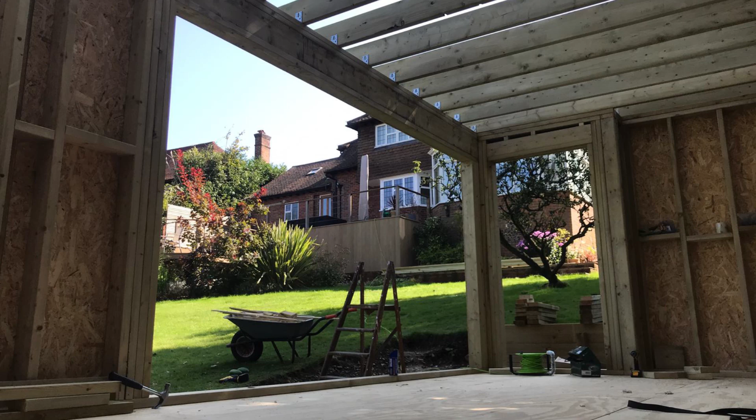I know many designers on YouTube use a program called SketchUp to design their garden rooms. My background is actually IT, but I still found it difficult to learn and was wasting too much time on it. So then I thought about using Microsoft Excel. I know this seems like a funny bit of software to use, but it did allow me to design and cost my entire garden room before it was built.

It gave me a cost for all of the immediate materials, such as the timber, the insulation, the vapor barriers, the rubber roof, etc., but not all the screws, nails and fixings, because I just had no idea what those numbers would be. We had a budget in mind, and this method reassured me that I'd finish the project within budget.

We wanted the garden room to be as large as it could possibly be within the UK planning policies and building regulations. So let's look at these a bit more closely.

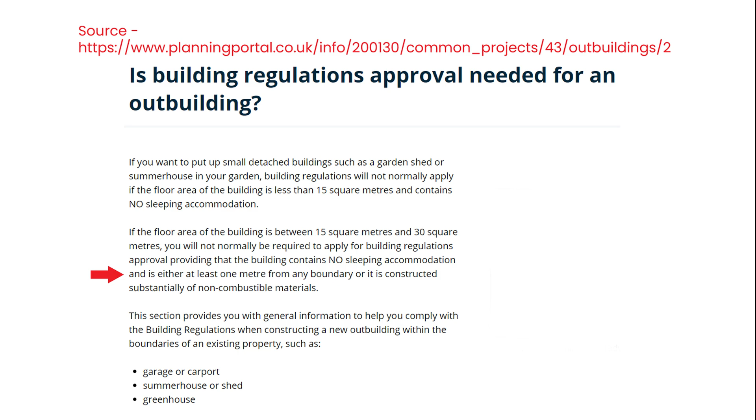The key point for building regulations for outbuildings is the internal floor area. Here, where the red arrow is, you can see that as long as the building contains no sleeping accommodation and is more than a metre away from our boundary, we can build something between 15 and 30 square metres internal space, and it will not require building regulations.

The key point for planning permission and outbuildings for our situation is also marked here in red. The outbuilding must be single-storey with an eaves height of 2.5 metres, and a roof no taller than 4 metres for a dual-pitched roof or 3 metres for any other roof.

The point in blue also applies: if the outbuilding is within 2 metres of the boundary, then it must be no taller than 2.5 metres. However, in our case, we were able to build 2 metres from the boundary and get that all-important height of 3 metres. This decision is mostly based on the fact I wanted the ease of building a warm roof construction, and therefore needed that extra height.

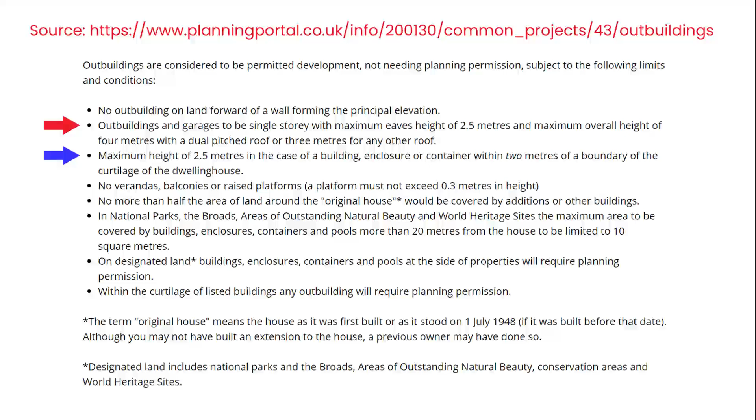Even though my building wouldn't have to comply with building regulations, as the garden room was going to be mainly used as an office 5 days a week and then as a small gym and TV room, I wanted to make it just as insulated as a room in the house would be.

So on my second tab in this spreadsheet, I copied in some information to do with span tables and kingspan U values. You can see in this table that the domestic building regs for 2020 are very tough - no way am I going to get down to these values. So then I looked at the non-domestic regs and thought that they would be achievable. After all, this is just an outbuilding.

The lines highlighted are what I decided to go with. In all 3 cases for the roof, walls and floor, 120mm thick PIR insulation would get me pretty close to the non-domestic building regs U values. Plus, this meant I could buy a big batch of 120mm insulation and use it across all of the areas, therefore reducing my waste.

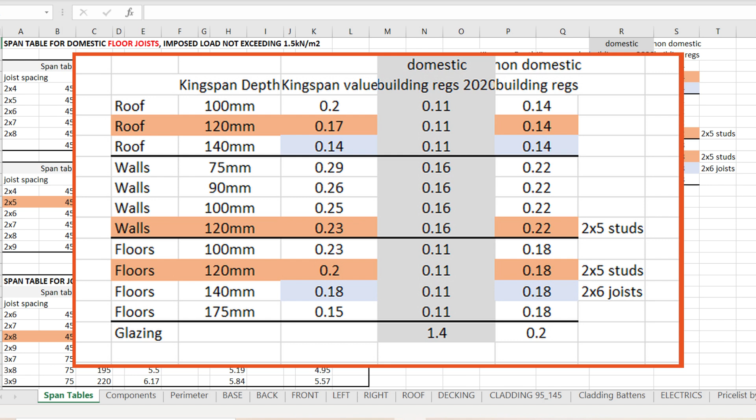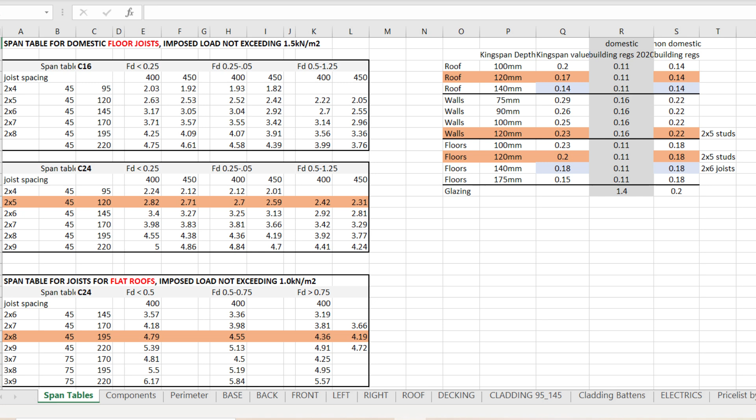Now that I know the thickness of insulation I need, it looks like much of the structure will be done in 2x5s. So what span does a C24 piece of 2x5 have?

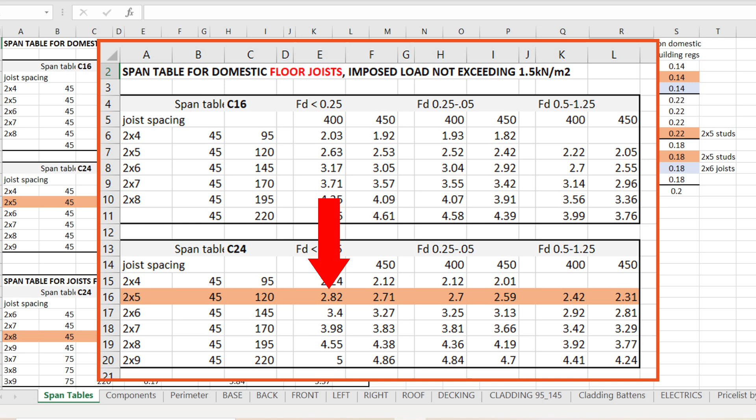When I look at my span table, I can see that for the greatest load, which I want to bear in mind as I'd like to have heavy gym equipment in one corner, a C24 2x5 at 400 centres will span 2.42 metres. The lightest load will span 2.82 metres. So this information dictates the distance between my piers.

When I look at the roof joist span table, I really don't want them to be larger than 2x8s. As I have a height restriction of 3 metres for my room, anything larger than a 2x8 would push me over. So when I look at the 2x8 span versus loading, I can see that the maximum span for the lightest load is 4.79 metres.

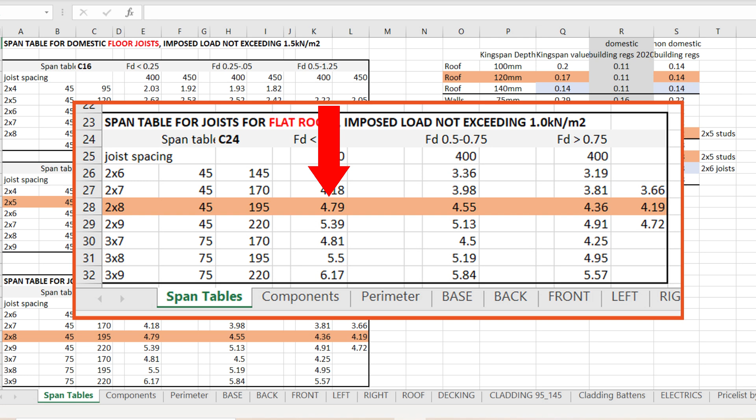Other than access for a bit of maintenance, the only heavy load throughout the year would be snow, and that doesn't hang around for too long down here in the southeast of the UK. So I'm happy with the 2x8s, and that dictates my greatest span as 4.79 metres.

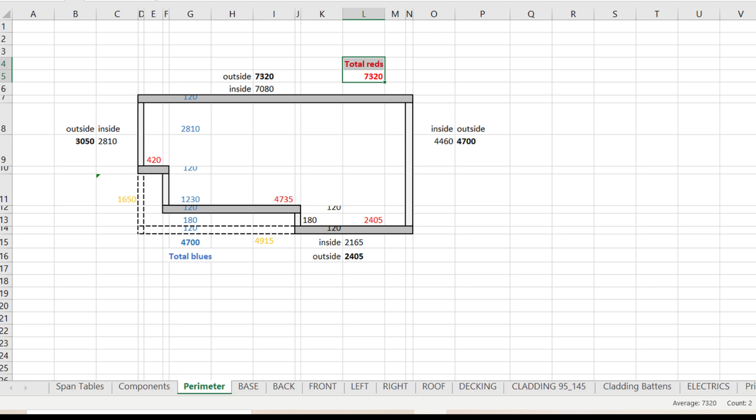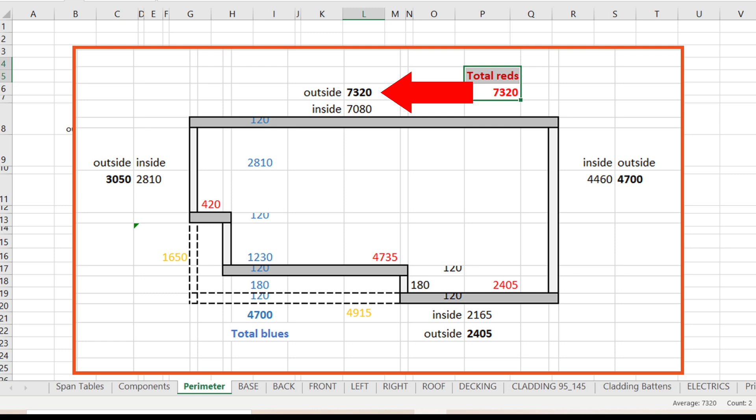Now that I have some parameters to think about, I can put together my garden room shape. I drew out a rough perimeter with a maximum depth of 4.7 metres because of the roof joists. I then worked out the length of my back wall so that I would stay under the magic 30 square metres of internal floor space for building regs compliance. This was roughly 7 metres wide. So now I have the shape and size of the room I wanted to build.

I then needed to look more closely at its components and build-up.

This is a really great way to visualize all of the different layers. It starts with my dense block at the bottom, then my 120mm base, then 18mm ply on top. Next is the wall makeup with the bottom plate, the stud and the double header. The rafters then sit on this, and the warm roof setup includes the 18mm OSB on top of the rafter, then the 90mm PIR insulation, then 11mm OSB on top of that, and then finished with a 1mm rubber roof.

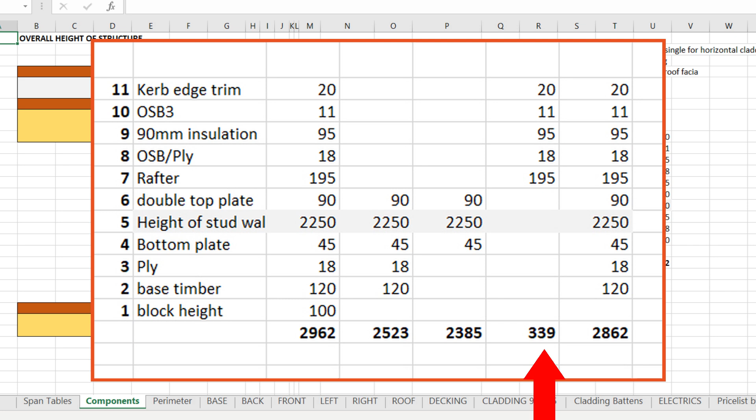As I built this in Excel, it has allowed me to play about with different combinations of figures so I can clearly see how tall my building is, how tall the eaves are, how tall the warm roof section is, etc. This is a lot of information to take in, so I'm going to speed up with this next part. This is the point I started mapping out my framing on the different sheets within Excel.

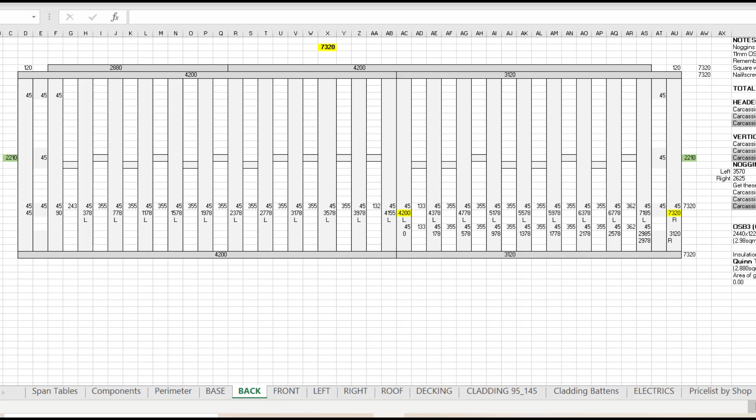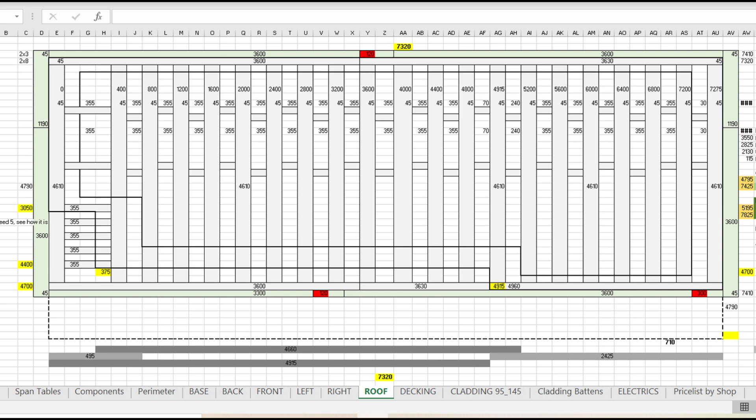I created one sheet for the base, one for each of the sides, and one for the roof. Not only could I work out each of my lengths of wood mathematically, but I could also work out how many pieces I'd get out of a 4.8 metre length, for example. I could also work out my noggins. This then meant I could cost the whole job as far as the timber, the insulation, and the OSB went before it was built.

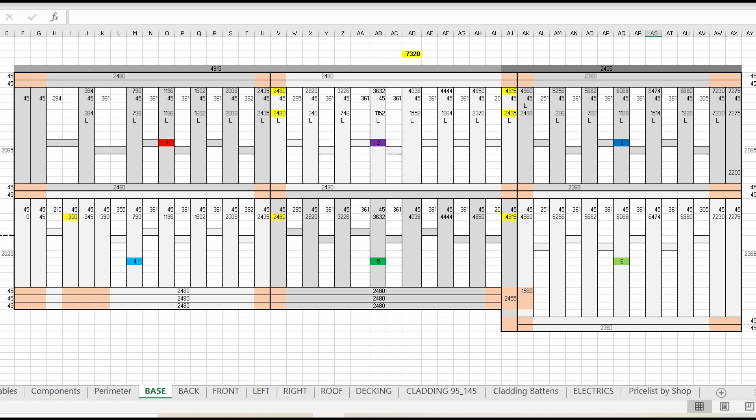Here is my base design. It's not to scale, it's just representative due to the limitations of Excel. Over on the right, I was then able to work out all of my cuts and costings for the base.

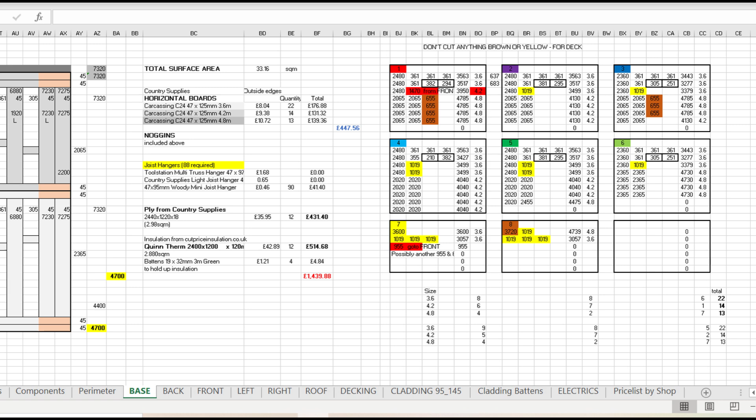I actually hit an issue with this design during the build, but this was down to the fact I didn't realise I needed double battens for vertical cladding. I'd only accounted for single battens, so I did change the cladding design, but you'll see more on this during that video.

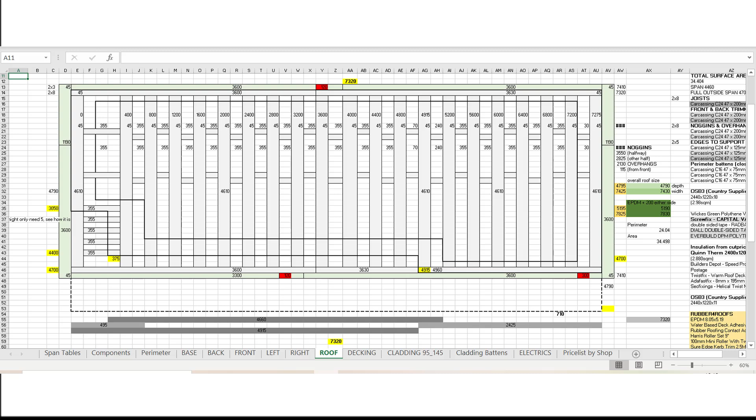To wrap everything up, I created links from each of my pages, taking the numbers of pieces of wood, OSB, etc. over to a master costings page, and it totted everything up for me so that I could see if I remained within my budget.